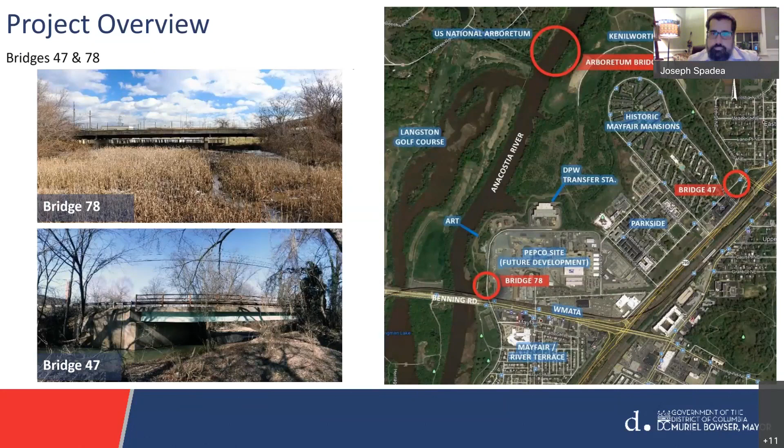On the left, you can see the photos. Bridge 47, as Ms. P mentioned, is a small crossing on Kenilworth Terrace that leads across Jay Street into Mayfair Mansions and the Parkside communities. And Bridge 78 is used primarily by the DPW transfer station, and also for folks that are recycling and delivering paper for shredding. I should mention too that all the projects are approximately one mile away from each other, so we have good familiarity with the concerns in the neighborhood.

A quick update: the team completed 30% design earlier this year. Essentially, what that means is that we were able to identify the appropriate type of bridge at each location. We've been continuously coordinating with the ANCs, 7D, the Federal Highway Administration, NPS, and several other agencies. In fact, we are currently in 65%, which is the intermediate design phase. This is the phase where we'll drill down and begin developing the details of the design so that they'll be ready for construction. Final design is anticipated to be at the end of summer next year. And then we would like to have the project begin construction at the end of 2022.

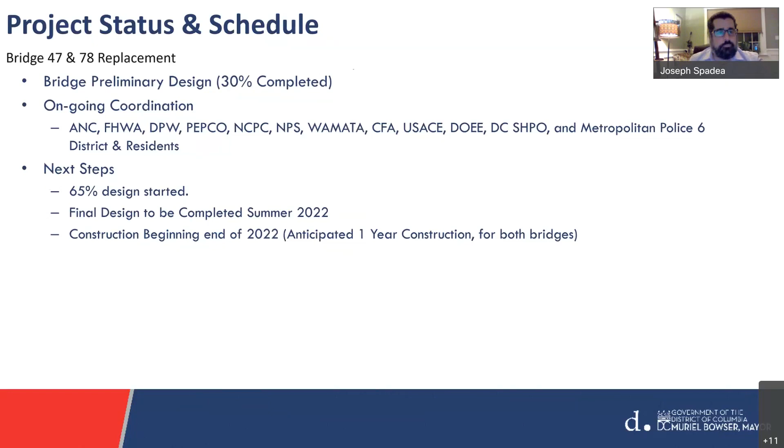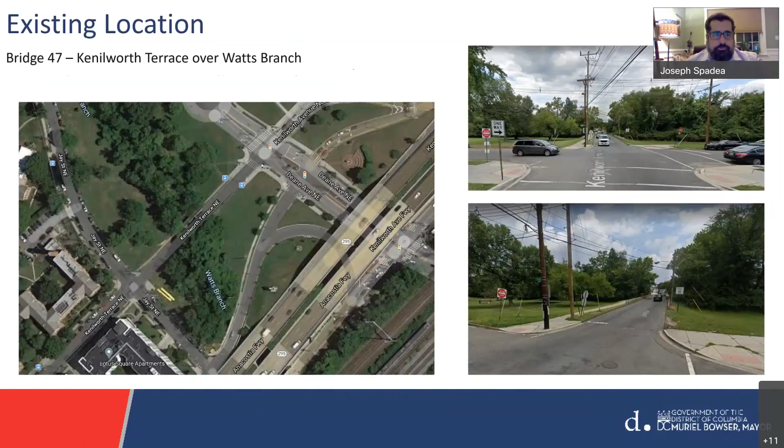Quick overview of the location for Bridge 47. As we mentioned, this bridge crosses over Watts Branch on Kenilworth Terrace, and then connects here with Jay Street and Deane Avenue. There's a few views at the end of the bridge, so it's a very short connection. We performed several site visits and a survey, did due diligence, and one thing that we noted was that this is the primary access point to the community. So from the north, most of you residents rely on this bridge, and we know how important it is. Right now it has a single sidewalk. It's also a connection point for the Metro bus, as well as several communities, including Mayfair Mansions. And then also another stakeholder would be National Park Service, who has Kenilworth Park to the north.

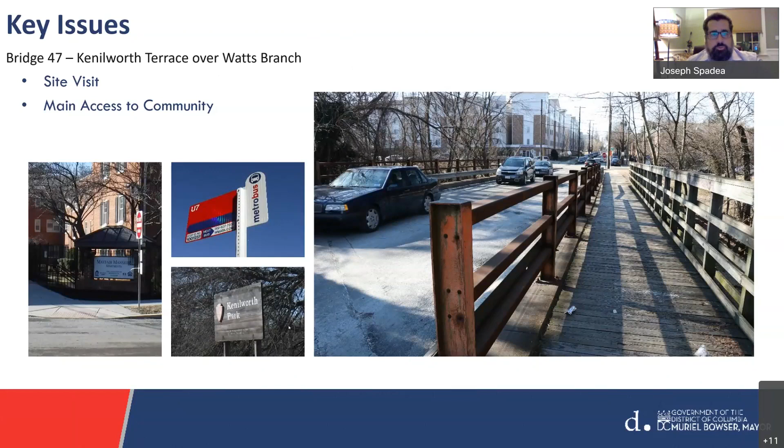Some of the key issues that we identified and reasons why we need to perform a replacement of the bridge. Number one, the bridge is currently load posted for 20 tons, which means it's not capable of handling today's modern heavy truck loads. Our plan is to increase capacity for the long term, and given that this bridge is your key entry point, we want to do it the right way. We don't want to put a Band-Aid on it. We want to fix it, replace it, and hopefully it'll serve you for a 75-year window without having to be disrupted.

One of the other problems we identified was that one of the abutments, and you can see it in the picture on the right, sits within Watts Branch. That's just due to, over time, the channel meanders, changes path, and currently is scouring underneath of that abutment.

So in the bridge world, we call these scour critical bridges, where the scour and washout under the abutment poses a threat to the stability of the bridge. So we want to make sure we remedy that by replacing it.

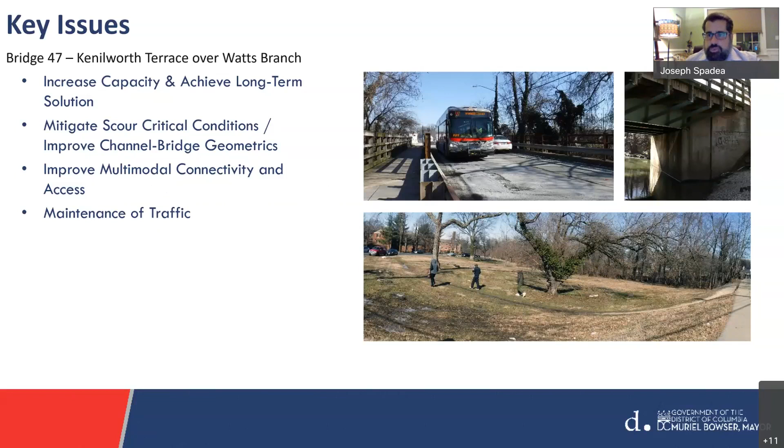And then another goal, as we noticed while we were there, a lot of pedestrians use the sidewalk. In the photo down here, you can see folks blazing their own pathway. So we want to provide, when we replace the bridge, 2 sidewalks, one on each side, so that sets the stage for future connectivity. And we go from 1 sidewalk to 2.

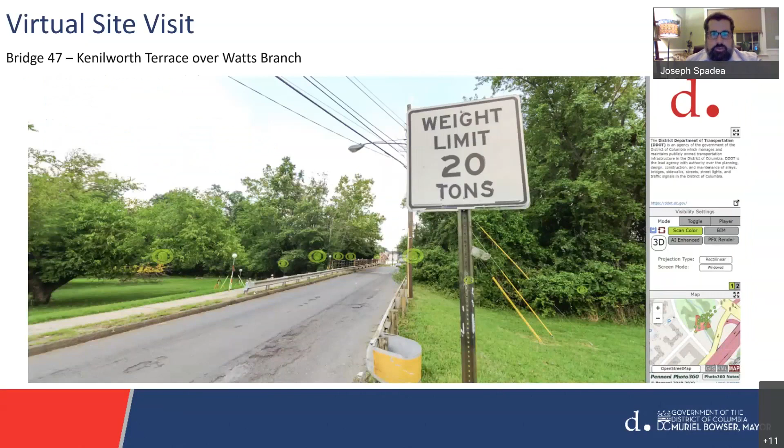As you can see here, a photo from our site visit. There's a 20-ton limit on the bridge, as I mentioned. This is a top-down view here, plan view, that I'm moving my mouse around. You can see here it's roughly 70 feet. And most of that abutment I had talked about is in the current stream. So our goal is going to be to replace this bridge with a longer span and one that has 2 sidewalks. So you can see here in the cross section, there's 1 sidewalk right now.

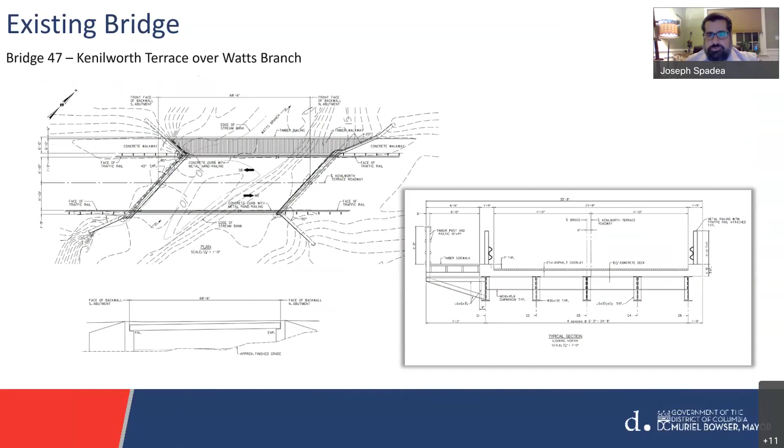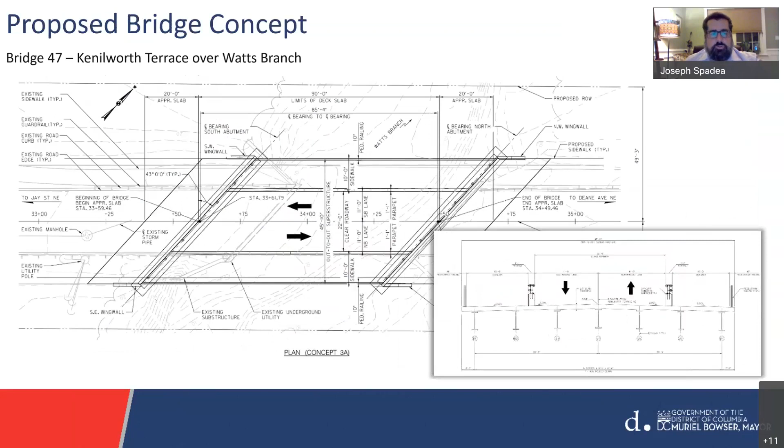And this is the proposed improvement. We're going to have a sidewalk on the north and on the south. We're going to expand the footprint so it goes from 70 feet to 90, and that will help us reconfigure the stream, reconfigure Watts Branch so it's no longer washing up into the abutments.

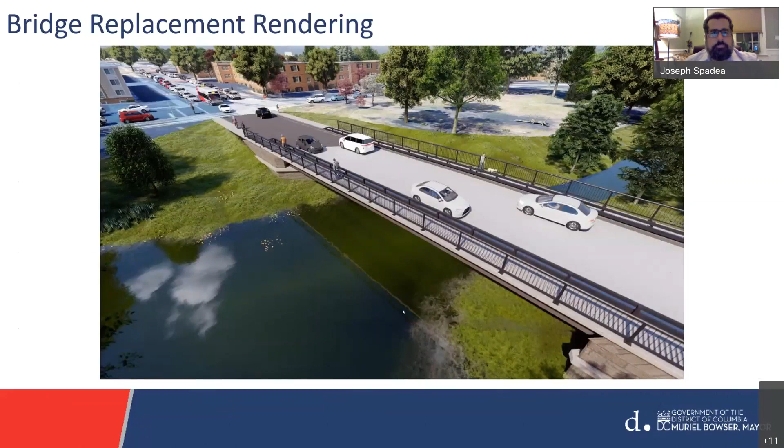We did study several types of maintenance of traffic. Overall, I should note that the project construction cost for replacement of the bridge is approximately $7 million that will be invested in the community here for this bridge. 2 options that we looked at. One would be a single lane closure that would allow traffic to continue to use Kenilworth Terrace and also have the opposite direction be maintained on Kenilworth Avenue Northeast.

With a single lane closure, which means we would close one part of the bridge, reconstruct it, then open that side, shift traffic over, reconstruct the other half. It's a longer process. It takes 6 to 9 months, but we are recommending this process because of the demand to maintain traffic in the area.

There is another option that we looked at, which may be of more interest to the community. This option involves closing the bridge completely for a period of 2 months. In closing the bridge completely, we would have somewhat longer detours, more complex maintenance of traffic. We would have temporary signals. We would redirect traffic here on Kenilworth Avenue Northeast.

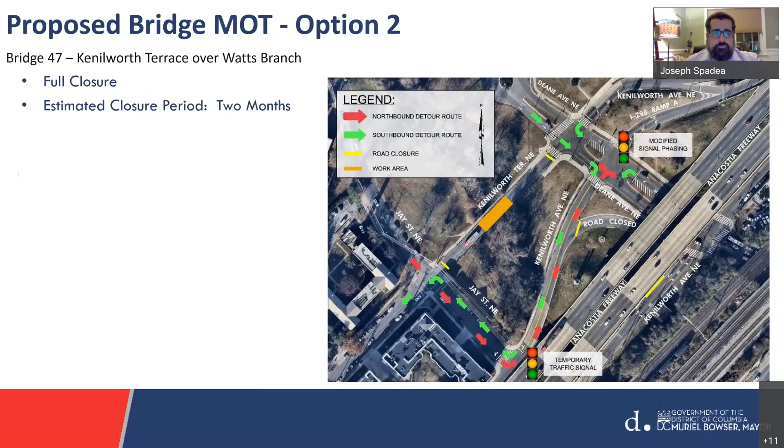However, we would be able to get in and get done in 2 months by using what we call accelerated bridge construction. If you think of a Lego set, these are prefabricated elements, usually concrete and steel, that are brought into the site. They're manufactured in a factory, and then they're brought to the site and assembled. And that allows us to accelerate the construction timeline.

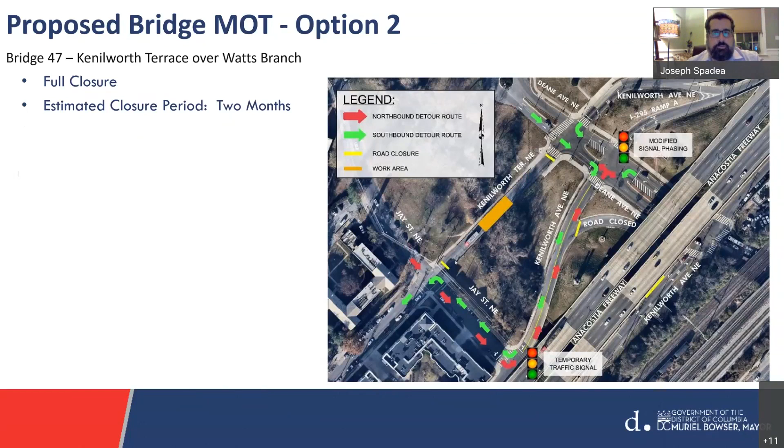The other bridge is Bridge 78, which carries Anacostia Avenue over Anacostia River Outlet at the old location of the Pepco power plant. You can see here, this is used by not only the Department of Public Works, it's used by the National Park Service, where they have Kenilworth Maintenance Yard. There's also, I believe, a DC watershed as well back there.

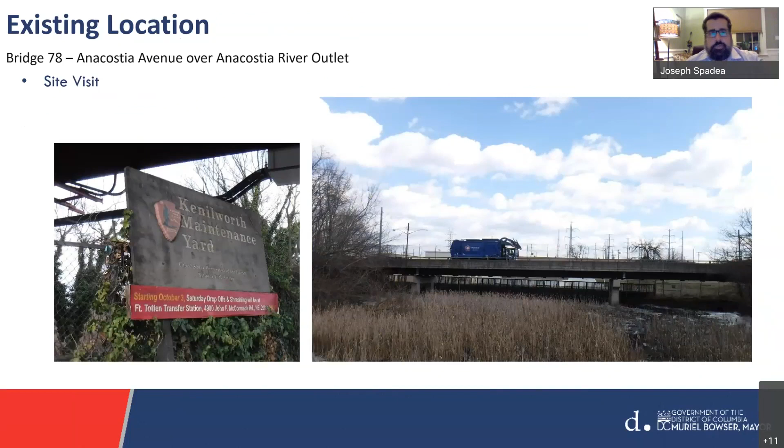And one of the main reasons this bridge needs to be replaced is, quite frankly, it's at the end of its useful life. There is significant deterioration on the bridge. There have been numerous repairs over the years, and it is no longer what we would recommend to be carrying the traffic that it's carrying, with the heavy trucks on a regular basis. The bridge has also been susceptible to vibrations, which has caused the bridge to be posted for a reduced load rating and a reduced speed limit.

And so we ultimately want to replace the bridge, again, to achieve a long-term solution. And we understand it would also help improve the long-term connectivity and circulation in the neighborhood and multimodal connectivity. The main challenge here, one of the key issues, is going to be maintenance of traffic.

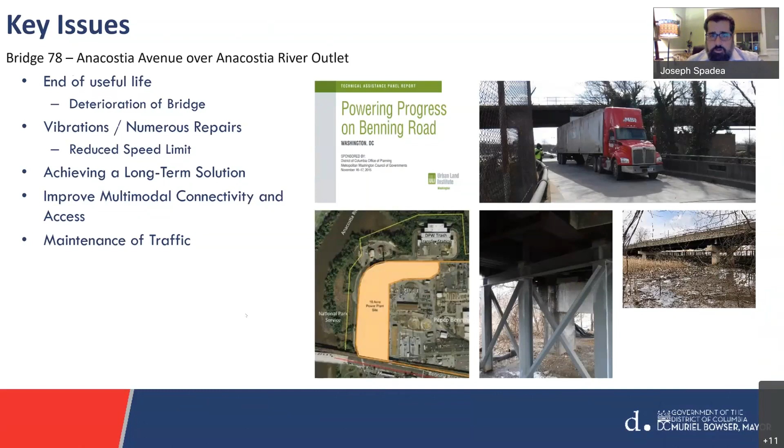DDOT and the design team are currently in discussions and coordination with Pepco. And as I'll show you, we're hoping that we can make use of part of Pepco's property to maintain temporary access to the trash transfer station and other areas.

Again, a key to point out here is that traffic must be maintained. The truck traffic begins at 4 a.m. and National Park Service requires access through 5 p.m. So that's the window, the bracket that we have to make sure we maintain traffic. We understand right now, I believe, that the transfer station has had some temporary closures, but we're working closely with the folks at DPW.

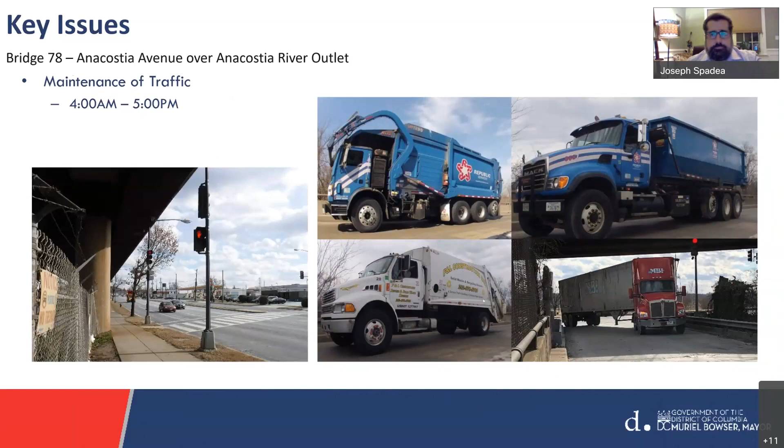This is a view from the field looking from Benning Road across the bridge. Anacostia River would be to your left. The Pepco site is immediately to the right where the chain link fence is. And I'd like to draw your attention to the roadway deck. It has several patches, repairs.

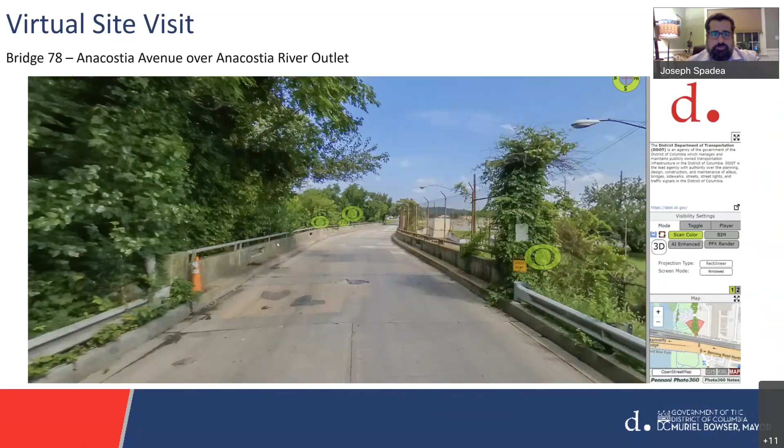It is below satisfactory. One of the other key things to point out is that there are no sidewalks on the bridge. And so one of the other main reasons to replacing this bridge is to provide a safe sidewalk for not only pedestrians, but folks that would use this bridge in the future, whether they're joggers or, quite frankly, bridge inspection folks that would maintain the bridge for DDOT.

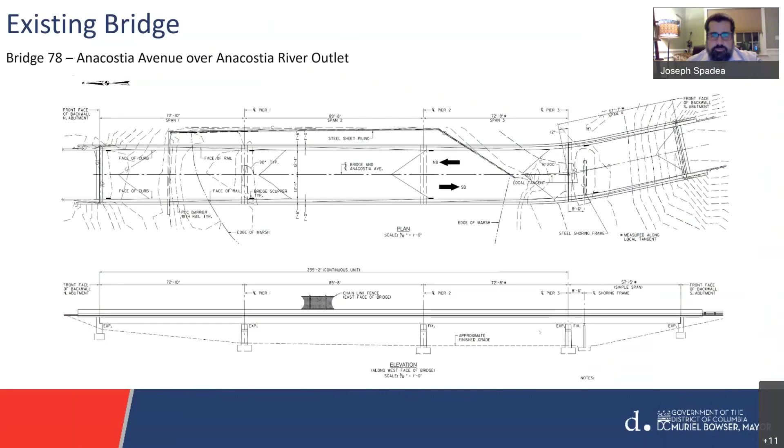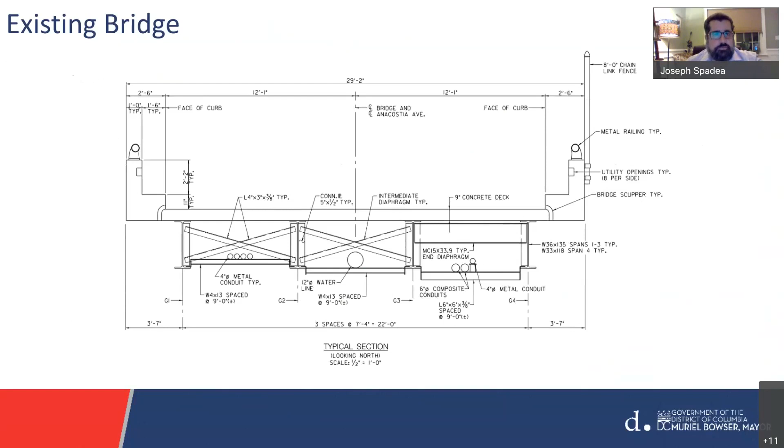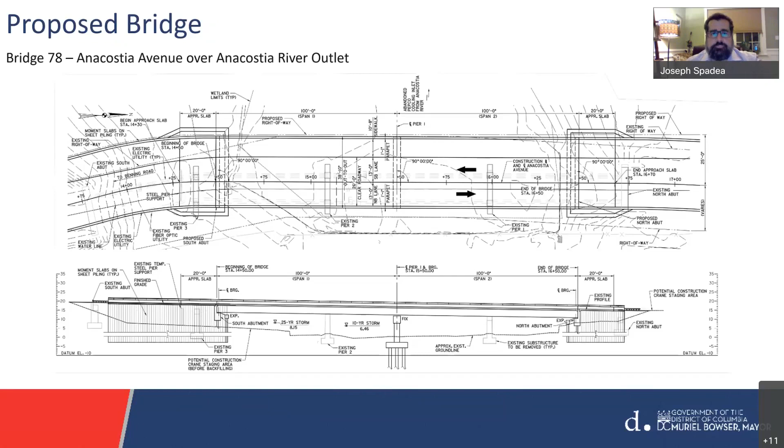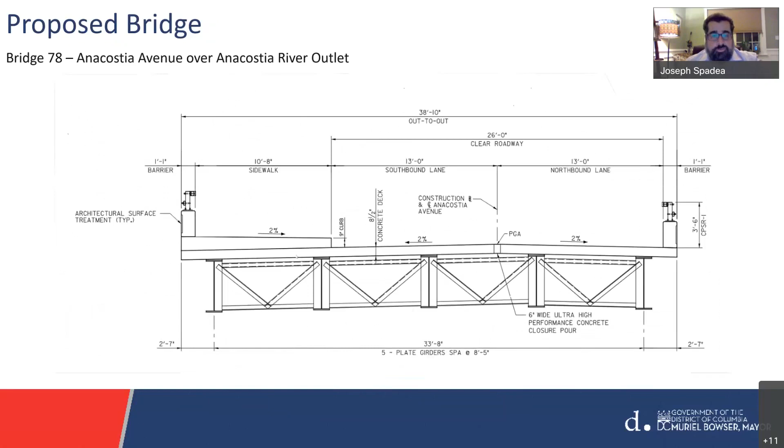And again, as I mentioned, we'll have a new sidewalk that will be on the west side, closest to Anacostia River.

As I mentioned, we're coordinating with Pepco. In this top-down view, you can see here in orange, this is approximately the location of our bridge. This is Anacostia Avenue. And we're looking at a couple different options for crossing through the location where the old power plant used to be. That's something we're looking at presently. This would help us maintain access again for the trash transfer and National Park Service.

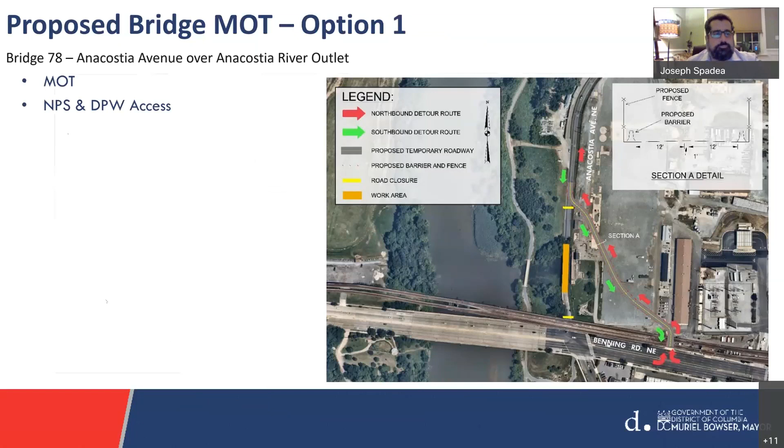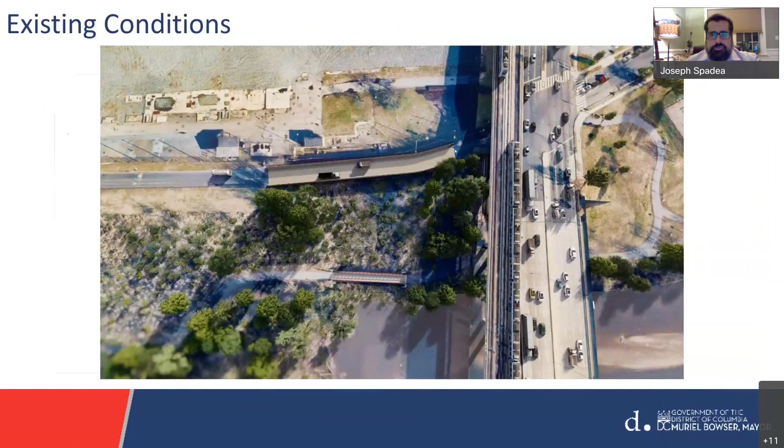This is a rendering just for comparison's sake, to show you the change in the size and the geometrics of the bridge. This is the existing Bridge 78, and this is the proposed Bridge 78. So you can see as I go back and forth, the amount of bridge structure we have is reduced, just the 2 spans here. And then there's a retaining wall approach that replaces all this other structure.

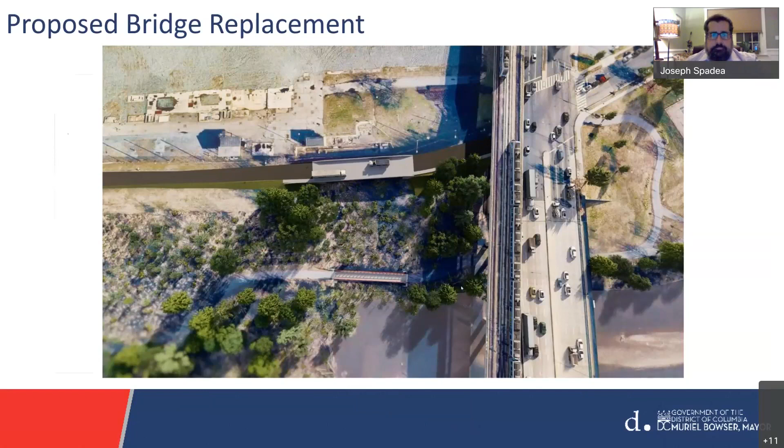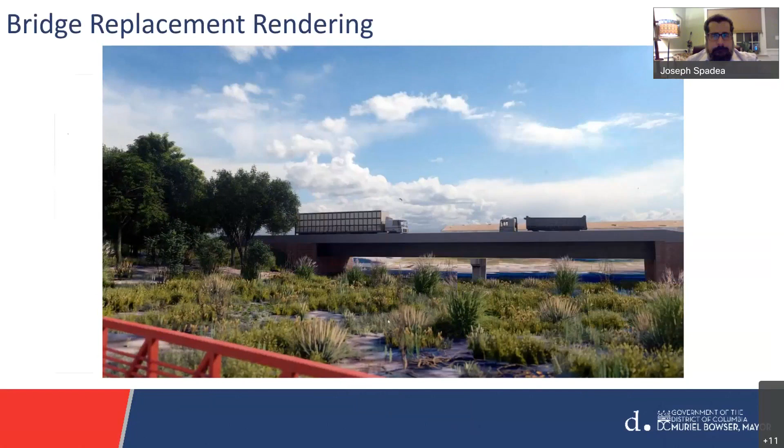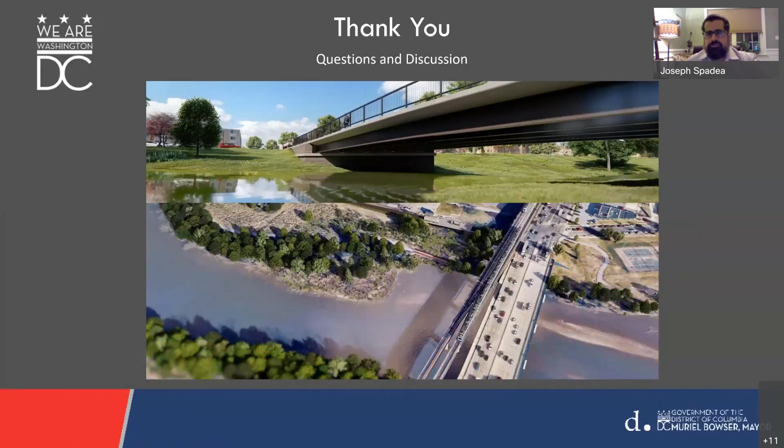That brings us to the end of our presentation, and I'd like to turn it back over to Stacy, and then we'll take some questions and provide some answers.